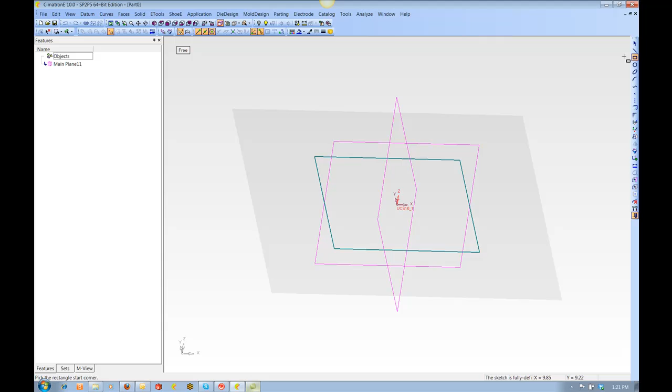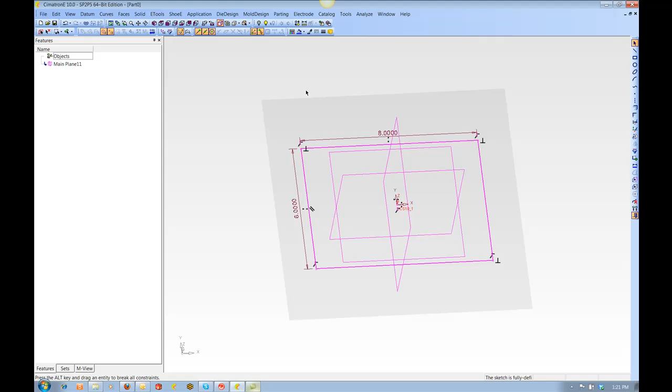Then I'm going to do a rectangle. I'm going to change it from free to dimension, and let's go 6 by 8, and I'm snapping to the center here so that it's constrained to the center. And then I'm going to right click and choose exit, solid, new, extrude. I'm just guessing on a height, doesn't really matter. We'll do 4 inches. Okay, and then let's put some rounds on it.

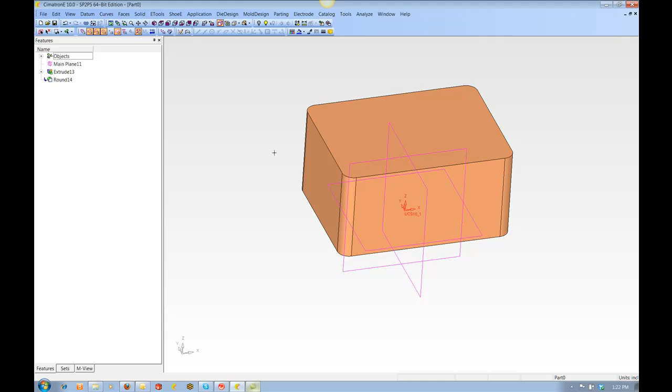Okay, and then let's roll it over to the back side, and we'll lay out a screw pattern. Again, sketcher, pick the face we're drawing on. I'm going to plop down 4 points. I'm careful to let these constraints light up so that they're tied to each other.

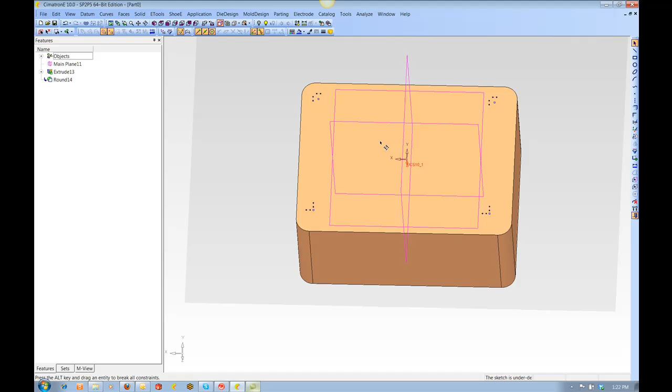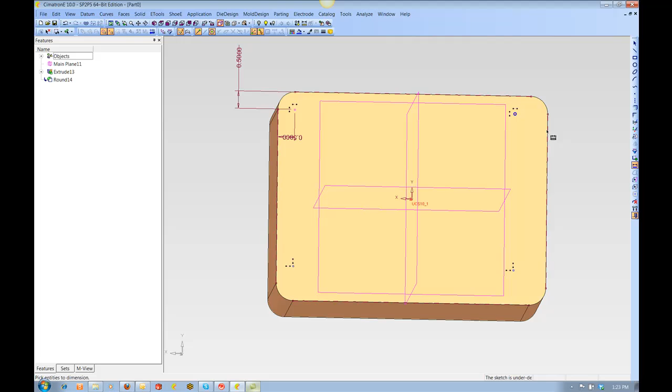Alright, now again, there's a lot of different ways that we can make this parametric. I'm going to do it kind of a quick and easy way, okay? I'm going to choose add reference right here. I'm going to pick these edges. And we'll dimension from this point to this edge. You see how they're turning pink when they're fully constrained?

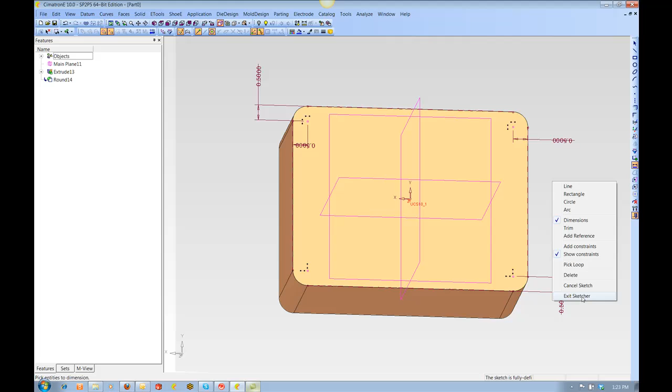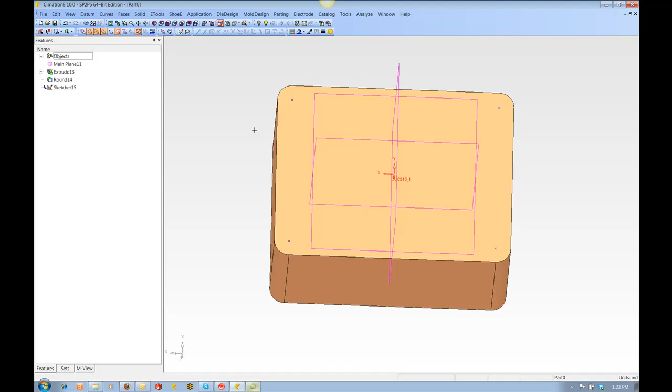Okay, so because they're locked in relationship to each other, that's all the dimensions I need to have that fully defined. Down here it says my sketch is fully defined. I'm going to choose exit. Alright, yeah, okay, this is what we're going to do. We're going to tie this distance to the same size as the rounds, so that if this insert was really big and had really big rounds, this distance would get further away from the wall. So this is how we build relationships.

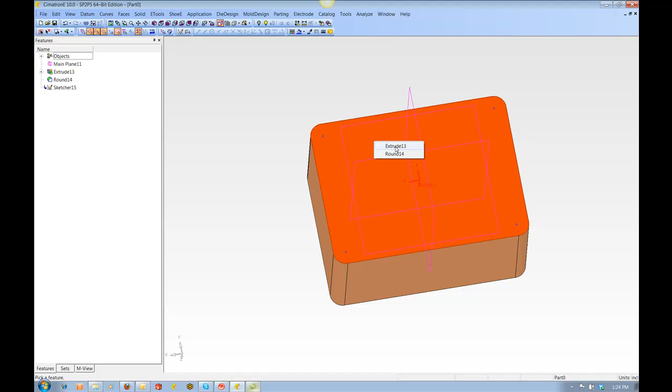I double click on the block, and I choose extrude, and these are the dimensions of the block. When you pick on it, you get this little option here called mark as a leading dimension. Now I'm going to do that for all 3 of these. I'll explain what that means in a minute.

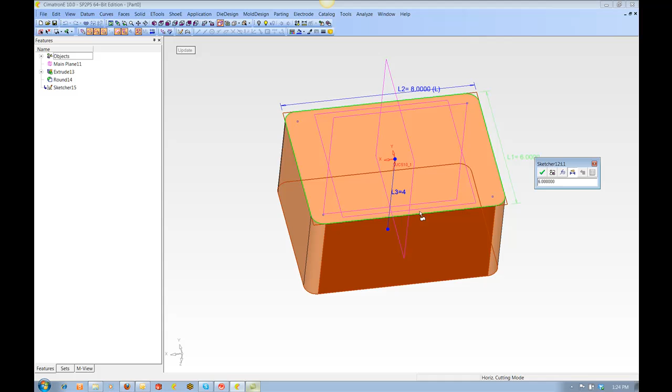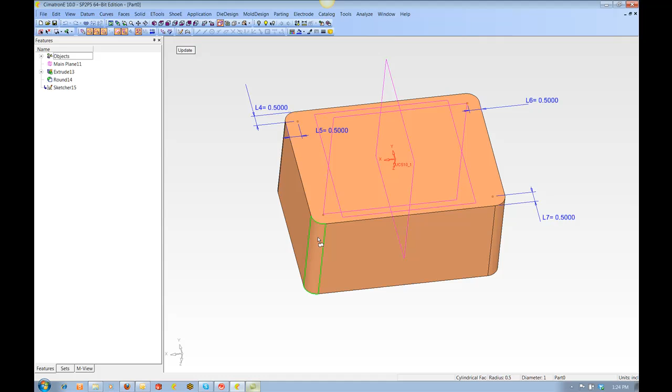Okay, and then here I'm double clicking on the point. My point filter is turned off. You got to pay attention to the filter. Okay, here's the dimensions of these points, and I'm going to double click on this round. Here's the value of my round. I'll make the round a leading dimension. Okay, and then

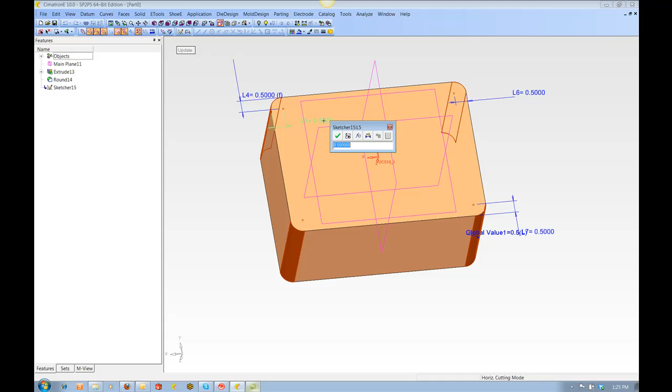this formula, or this value right here, we're going to make a formula, and I'm just clicking over here. So this value is this value right now. I could make it times 2 divided by 2. I can put whatever kind of mathematical expression that I want here, but I think just making it the same will be good. Alright, and then these ones, we can either tie it to this one again or tie them all back to this one. It wouldn't really matter. I think I'll tie them all back to this one. Whoops.

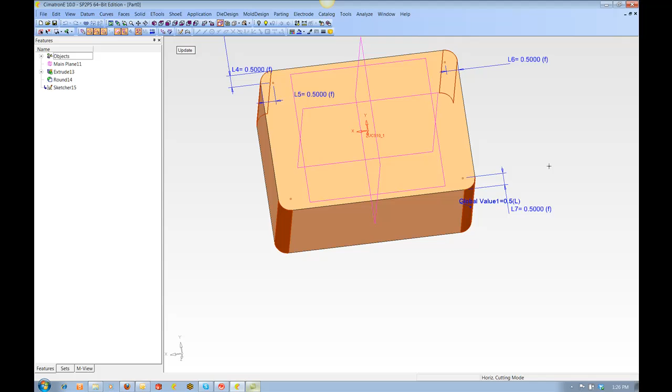Okay, so now you'll see that these all have an F next to them, meaning that they're a formula-driven parameter. And this has an L next to it because it's a leading dimension. Okay, so now let me show you what leading dimension means. When I come up here and I choose Edit, Leading Dimensions, this is what we're going to have access to when we're placing the insert. So we'll be able to size it and change the radius value for each job.

And we can rename these as well. So this one we'll call corner rad. This one will be insert width. This one will be insert length. And this one will be insert height.

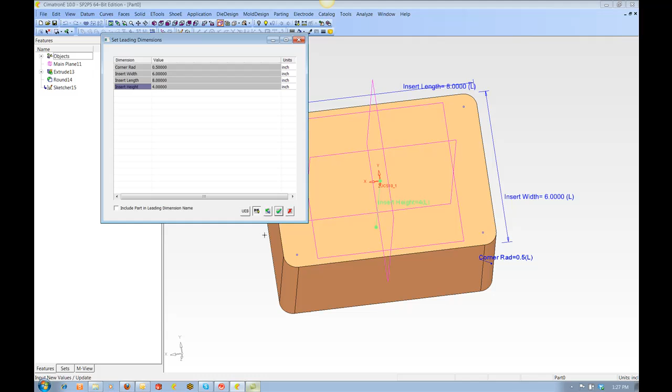Okay, so all we need now is a cutting body. Now normally I would create a new sketch, do a new extrude, and relate the cutting body's dimensions. I would use a formula and tie it to these ones. But for sake of time, I'm going to take the lazy way out, and I'm just going to do a copy of this one. Okay, so watch this.

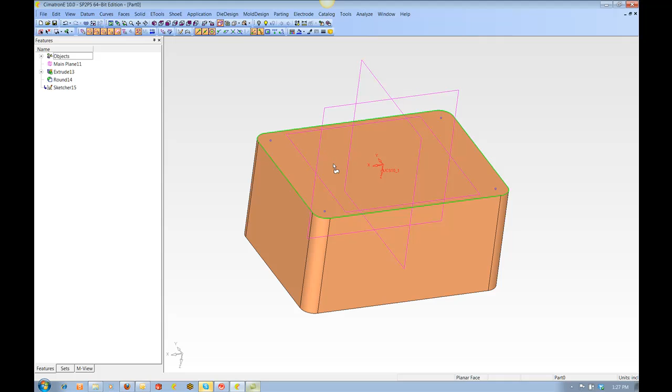I'm going to choose Edit, Copy, Linear, picking this block. I'm going to move it up 5 inches. Okay, so now I've got a copy of it, right? Then I'm going to mark it as a cutting body. Tools, attach name to entity. I know, not very easy to remember, so burn this into your brain. Attach name to entity.

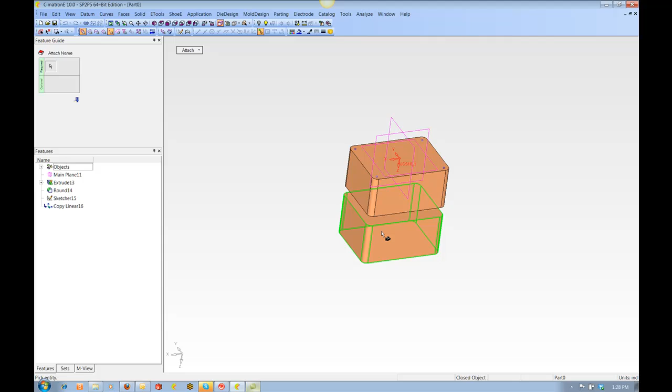And you have to set your filter to a body, because we can have a cutting object as a face, but we need the cutting object to be a body. So all I did was pick here, put an X there for cutting objects. Don't worry about the name, it's not important.

I'll try to explain this as best I can. Basically, when I'm placing this insert in a job, it can either cut what this part interferes with in the mold, or it can cut what the part and cutting body interferes with in the mold. Most of the time, by part is the better option, but that's what it means.

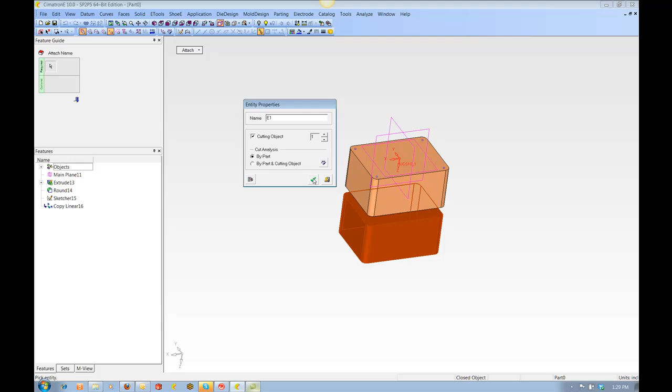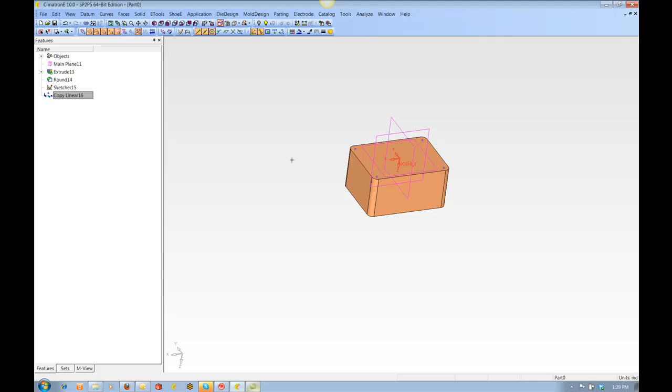Okay, so this is now a cutting object, and now I'll just delete this copy. Oh, wait a minute, no, I can't do that, or else I'll delete it altogether. I guess we'll move it back. Edit, or wait a second, I know what we did. I put a 5 value there. Yeah, so it's copied, but not in any distance. Now there's 2 of them sitting there. One's a cut body, and one's the real insert. And you're not going to see the cut insert anyways, well, assuming that we hide it.

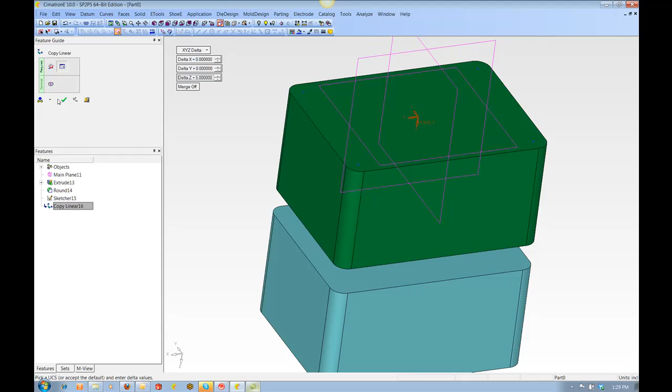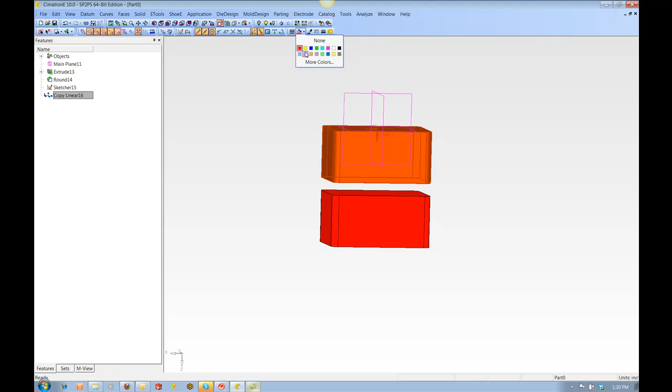Again, this is kind of the quick and lazy approach, because right now I have a real hard time telling the difference between the real insert and the cut body. Let's do this again. I think we'll change the color to make it a little bit easier. Okay, so that's our cut body. And while we're here, why don't we change the color of this one too? Okay.

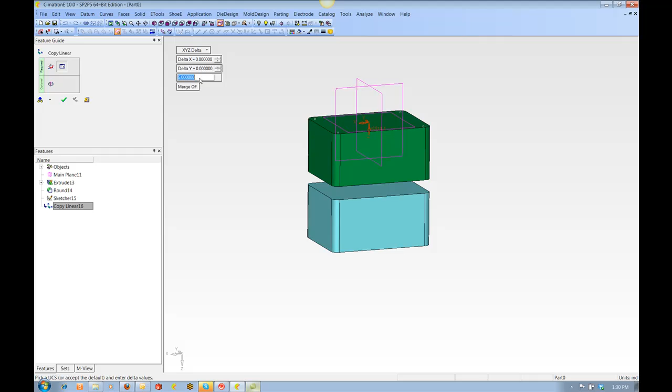In fact, yeah, let's just hide this guy. So I set my filter to body, pick him, hide it. We'll edit this one and put that back to 0. Okay, and then we're gonna hit save, and let's call this mold insert. I don't believe I have any of those in here. Okay, and we'll close it.

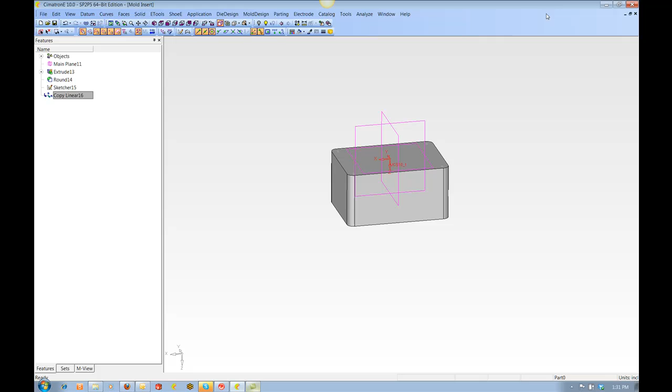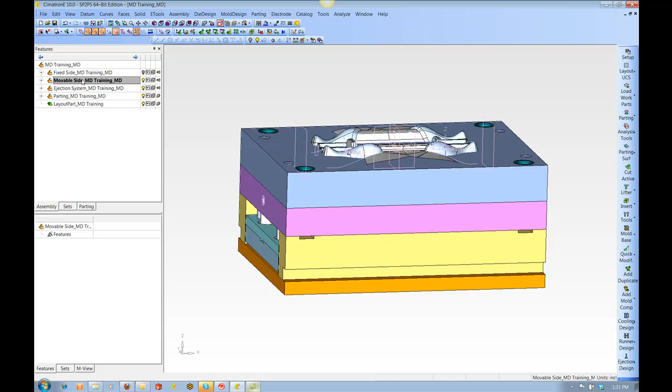Okay, now we're ready to bring that insert in and parametrically size it. So if the insert is going to go on the B side, I need to have that one activated. Okay, here's the movable side subassembly. That's where the insert needs to go. Now I'm going to hit the plus sign next to it, and we'll hide the B plate temporarily. Just makes it easier for placing the insert.

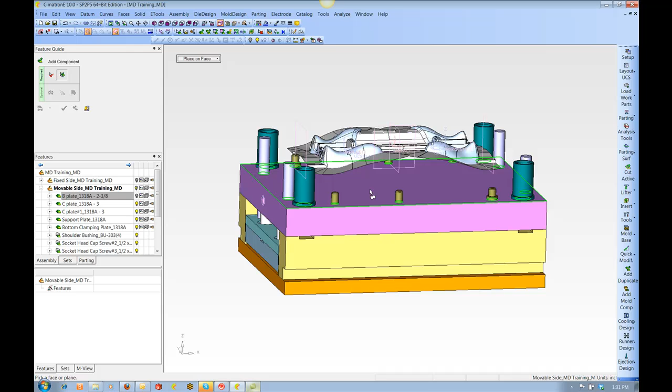So I'm going to choose Assembly, Add Duplicate. The reason I'm choosing Add Duplicate is because I want a copy of that insert so that we can use it in many jobs in the future. Okay, here's the insert we made. We're going to place it by face. This is the face it sits on. And then I'm going to snap to the center, to this origin. See that little green circle lighting up?

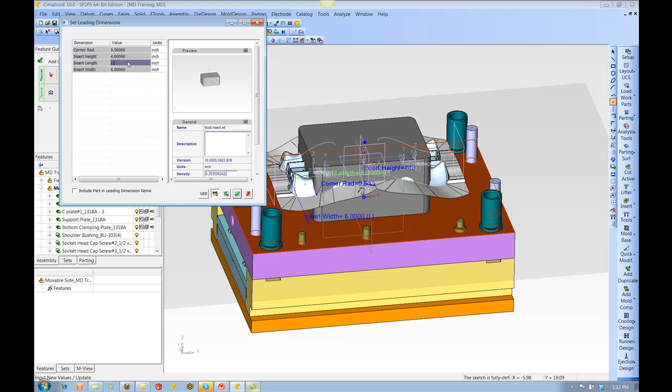Okay, clearly it's not the right size, but that's what this is for. Edit leading dimensions. And let's go 12 by 8. Let's see how that looks. Let's go to the top view. Yeah, it looks okay actually.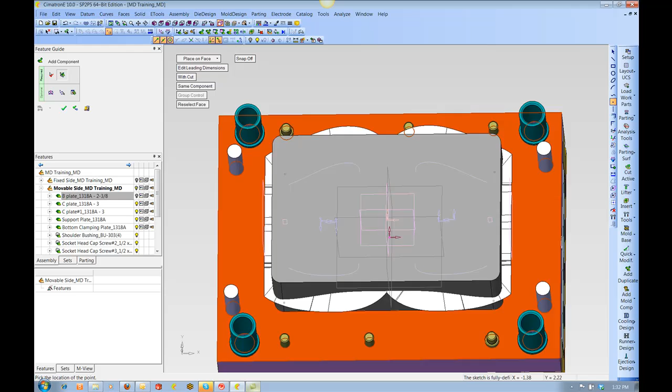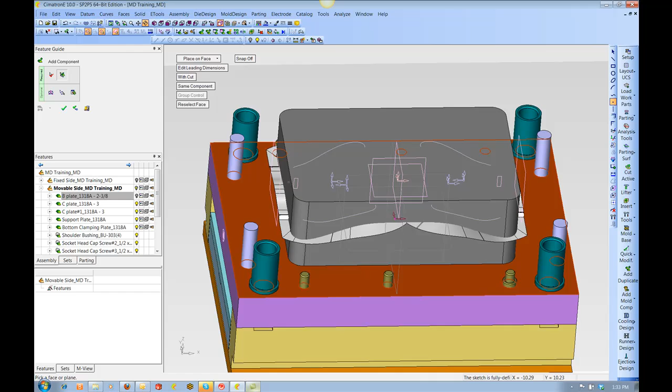Alright, and then let's also change the size of our corner radius from 1/2 inch to 3/4. And we should see these dots move in where our screws will attach. Okay, good. And we want to place this with cut. So when we drop this in, that cutting body is going to cut our B plate.

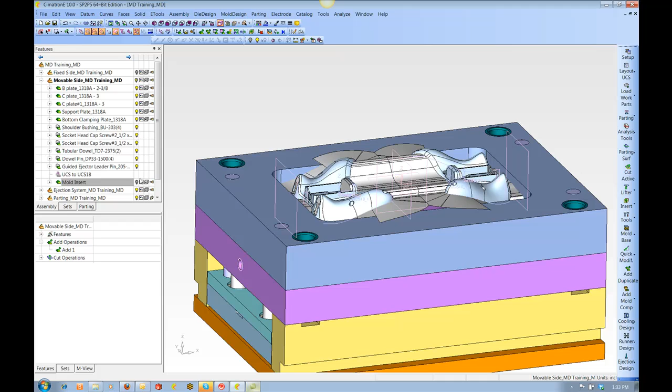Okay, here's the B plate. Let's hide the insert. The cut took place. And let's see, let's hide the B plate again. And now we're ready to cut the insert with the parting surfaces.